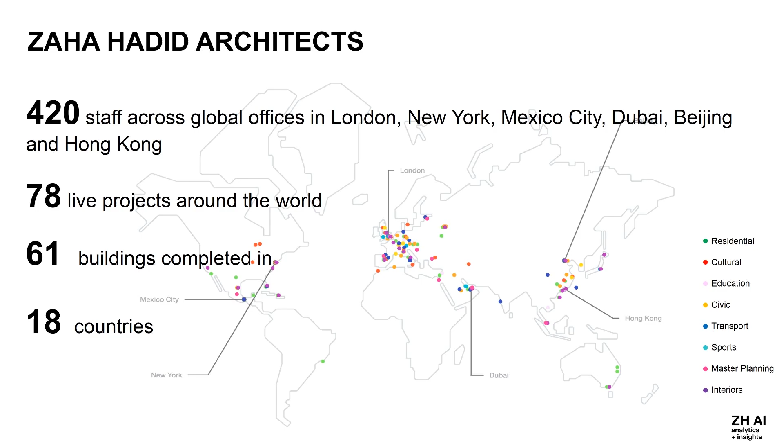of spatial design. For those of you who don't know ZHA, these are a couple of significant numbers about the practice, which is truly a global one, not only in terms of project locations, but also its employees. Currently, 78 ongoing projects around the world, with 61 projects completed in 18 different countries. We work at all scales and in all sectors with a strong focus on highly expressive architecture. One of the most iconic projects is the Heydar Aliyev Center in Baku.

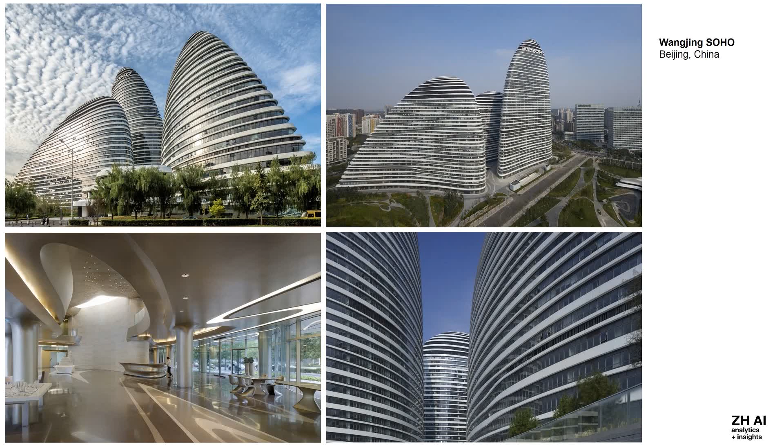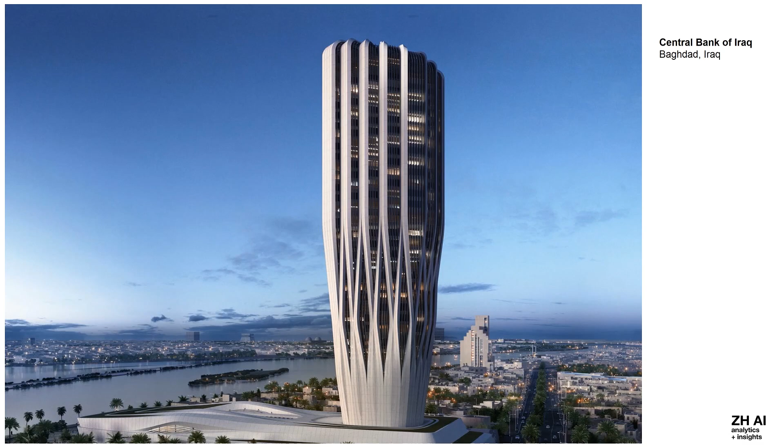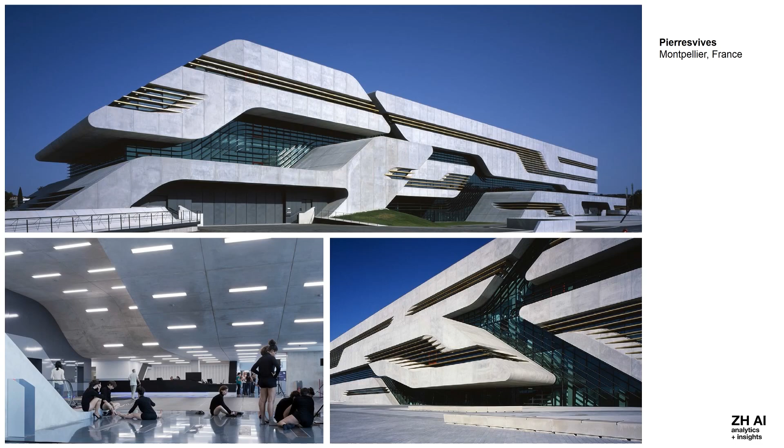But we will focus on the workplace-related projects of ZHA, like Wangjing SOHO, a 3-tower mixed-use development in Beijing, China, or the Central Bank of Iraq in Baghdad, conveying its core values, solidity, stability, and sustainability. The BMW Central Building in Leipzig, Germany, where the factory assembly lines run through the office space, the Antwerp Port House of the Port Authorities in Belgium, the Pierresvives Building for the Département de l'Hérault unifies 3 institutions within a single envelope: the Public Archive, a library, and the administration for the Department of Arts, Culture and Sport.

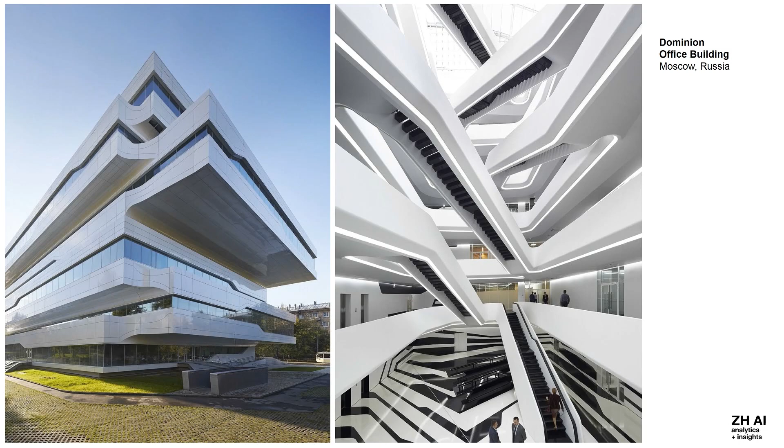Sberbank Technopark at the Skolkovo Innovation Center in Moscow, Russia, considered to be Russia's Silicon Valley, spanning almost 700 meters in the longest direction of the building. The Dominion Office Building is among the first of the new projects to be built for the growing creative and IT sectors in this primarily industrial and residential district in the southeast of Moscow.

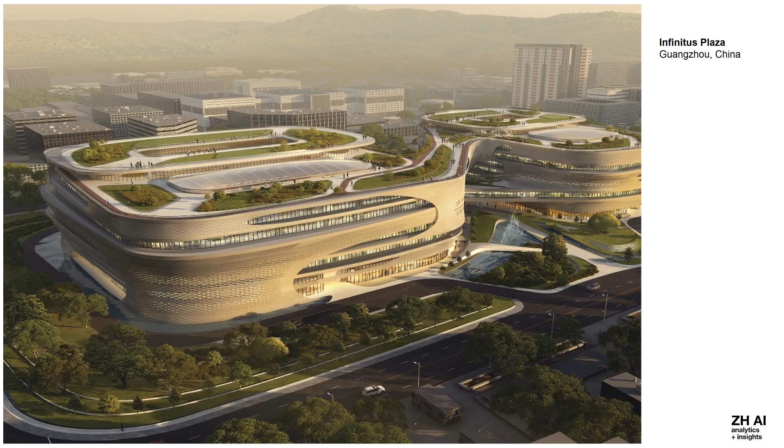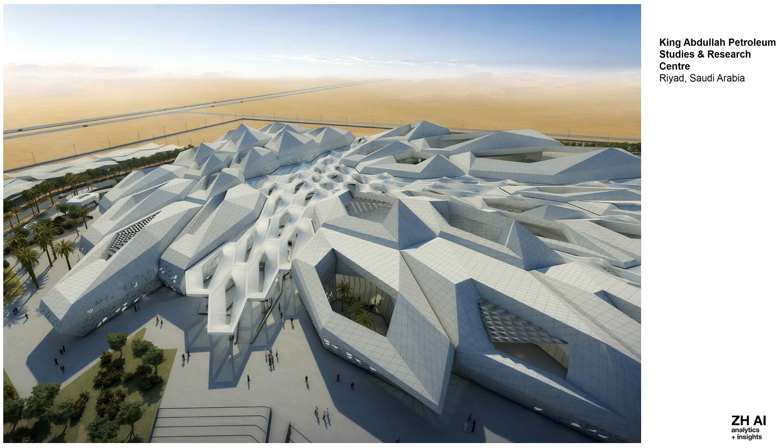Infinitus Plaza in Baiyun New Town, Guangzhou, China, which will be a campus of integrated buildings that combine intelligent technologies and environmental sustainability for LKK Health Products Group. King Abdullah Petroleum Studies and Research Center, which is executing the vision for a center-focused cellular structure of crystalline forms, a strong protective outer shell concealing soft, porous, sheltered courtyards within.

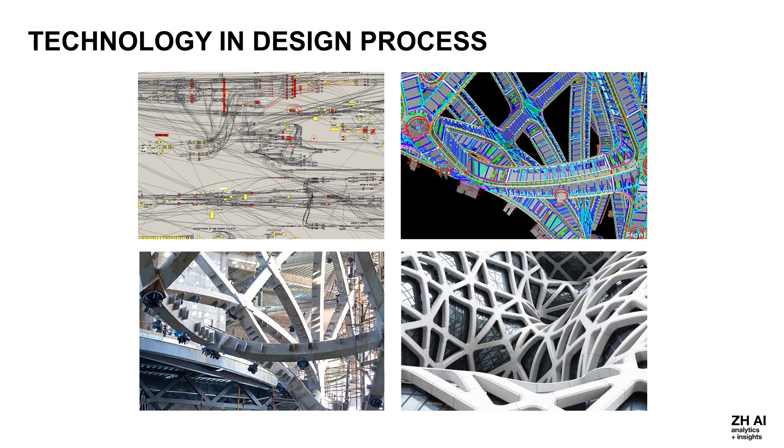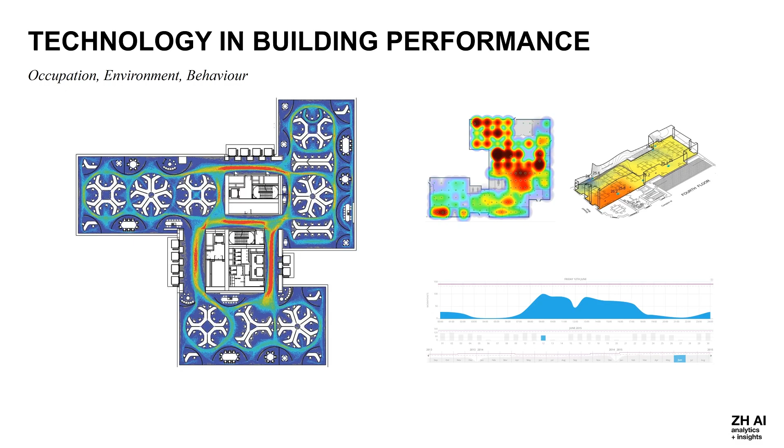So while early computational research at Zaha Hadid Architects focused on fabrication and the delivery of solutions for the complex geometry problems that characterize the firm's projects, new research streams, such as the one conducted by our team, focus on user satisfaction and building performance data, as well as virtual simulations of users' behavior in office spaces. Everybody knows that collaboration, strengthening the organization as a collective, and supporting well-being is necessary for a successful workforce, but how can we measure these things and derive valuable insights to make better design decisions?

When we talk about collaboration, one of our basic premises is that physical proximity has a direct impact on communication potential, which has been further linked to collaborative behavior in the workplace. MIT professor Thomas Allen discovered how communication drops drastically as distance increases, and that it pretty much drops to 0 after about 20 meters, which is a 20-second walk. Let's look at an application of this theory. Consider a typical center core building, such as this one. How many people are in the range of any of these desk locations?

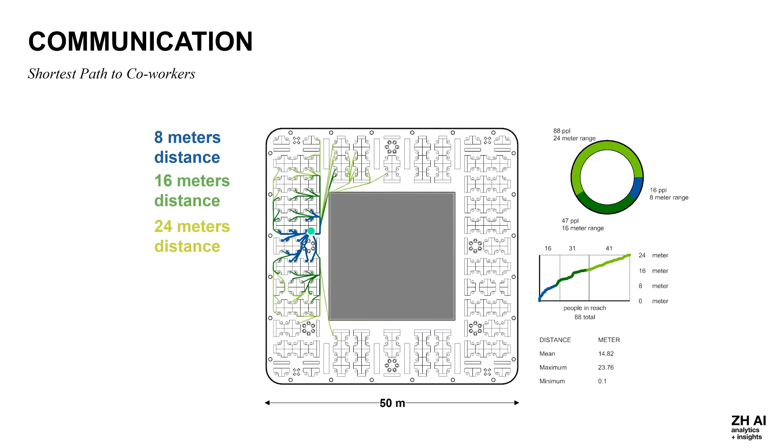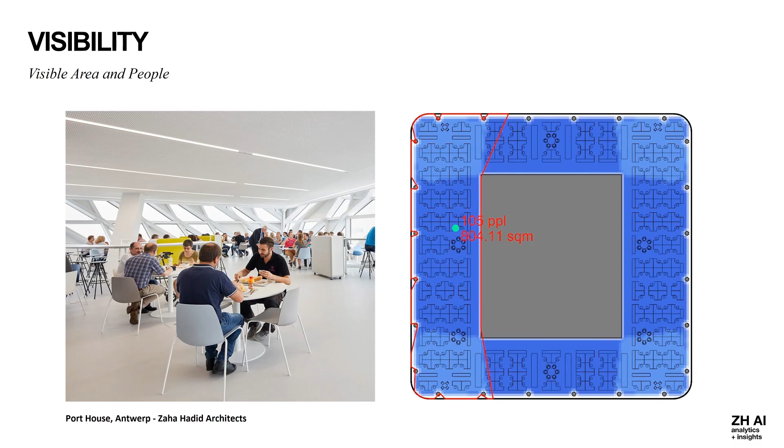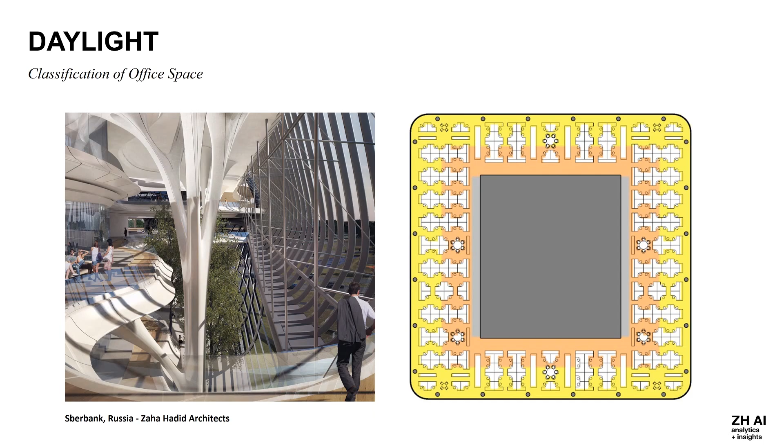This is an analysis tool for visible area. We are looking into how much area and how many people are visible from every spot on the floor plate. The dark blue and red areas indicate bad and light blue good visibility. We can also look at how each space compares in terms of environmental qualities like daylight penetration and categorize it according to the British Council for Offices into Class A, B and C lit space.

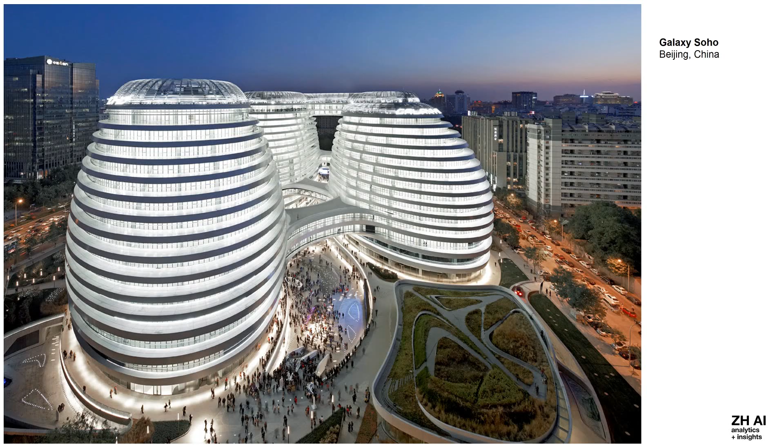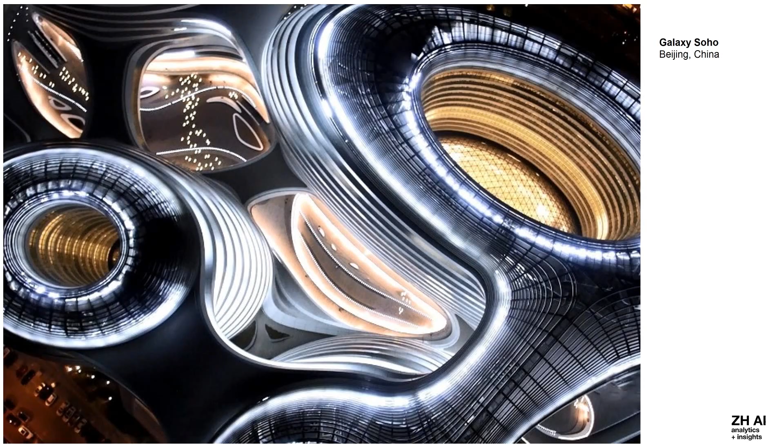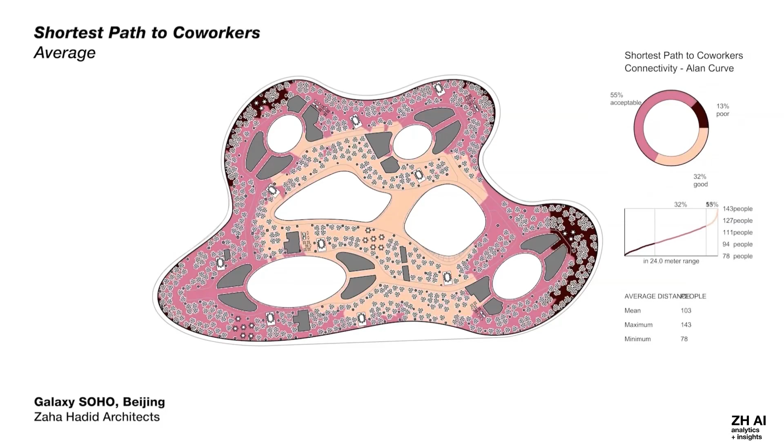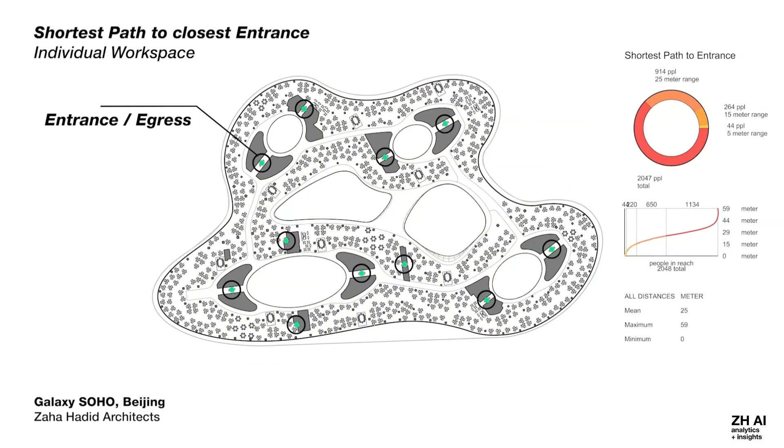This is the connectivity analysis. As a result, we can see which areas best suit independent teams in the more segregated parts of the office and interdependent teams in more central locations. We can also look at aspects like the shortest path to the office entrance. And we are able to identify most public and confidential spaces, as well as where to locate most and least mobile teams.

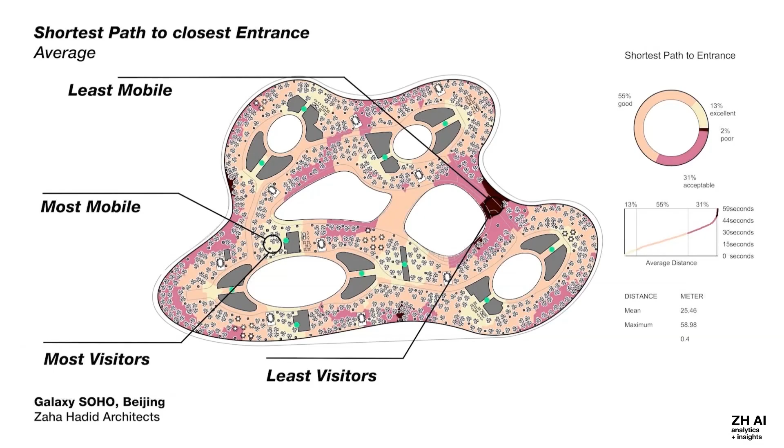Similarly, how close you are to facilities like breakout areas or other amenities. This allows us to determine the areas in which you are most likely to encounter the least distraction and quieter zones, as well as the noisier ones.

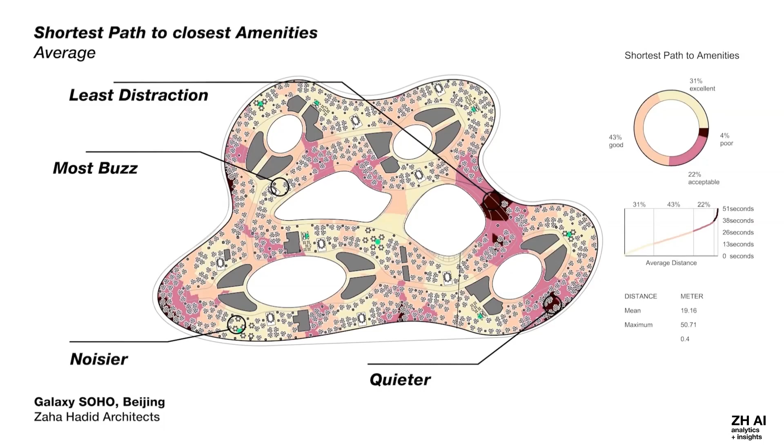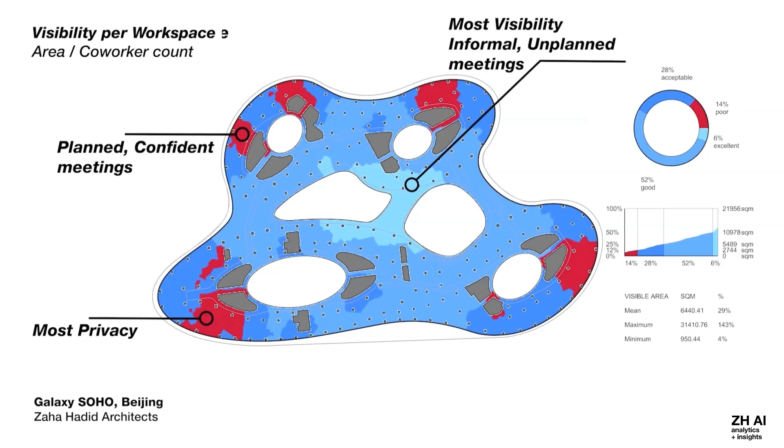How much of your surroundings you can see and how well you can be seen from a given location determines how exposed certain areas are to the public sight, helping the planning process by identifying which zones can be used for more planned, confidential meetings out of sight and zones for more informal, unplanned meetings in plain sight.

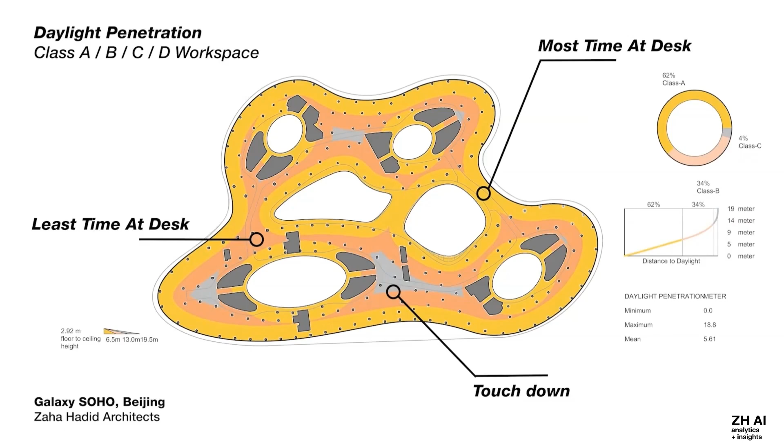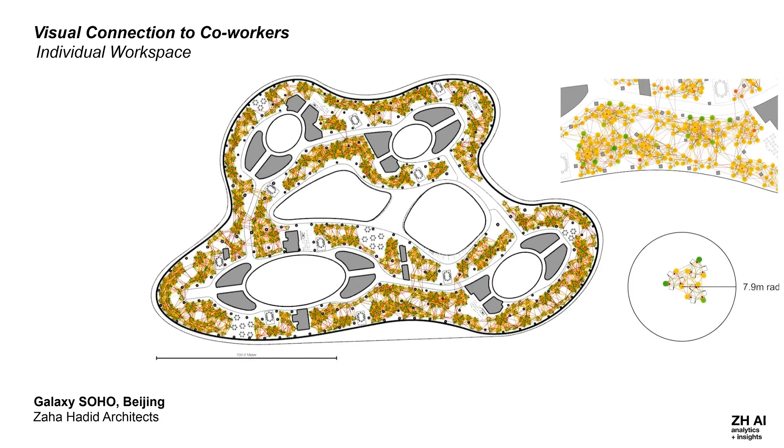Calculating the amount of daylight coming into the floor plate allows us to identify zones for different degrees of permanence. The best lit parts are great for spending most time at the desk, whereas zones with less daylight are better for short stay periods or touchdown zones. And also look at how different orientations of desks within these areas can affect visual connections with coworkers, as well as views. There's no point having a great view if your desk is facing away from it.

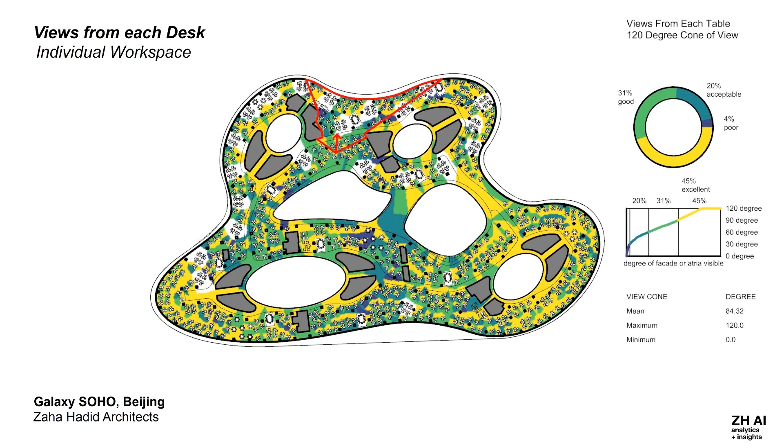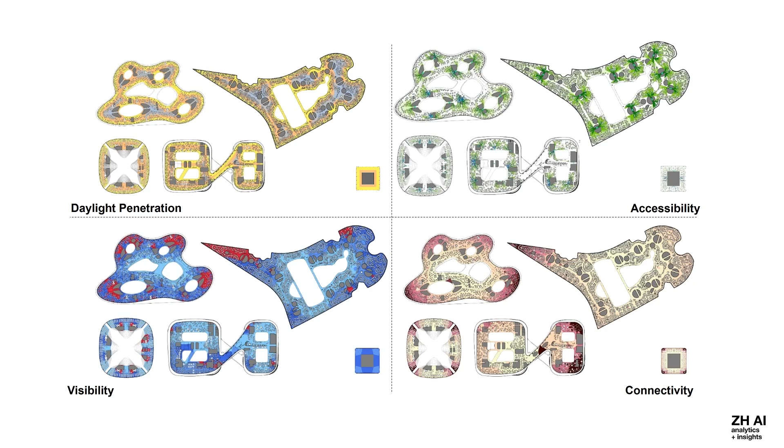The design analytics of past projects gives us a great idea of how specific design decisions supported or limited performance of space. We know now how to measure and quantify certain human-centric qualities of space and can start to think of how to actually design spatial conditions with the outcomes of those qualities in mind.

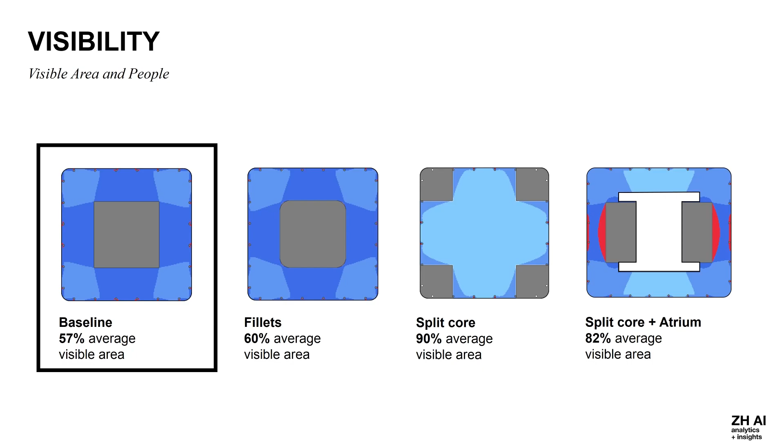Considering the center core tower as our baseline, looking at the visible area parameter, with 57% average visibility, by just chamfering the edges of the core, we can increase visibility by 3%, or with even more drastic changes, like splitting the core into 4 and pushing them into the corners, we can increase visibility by 33%. A more realistic option would be splitting the core into 2 and including an atrium, which still increases visibility by 25%.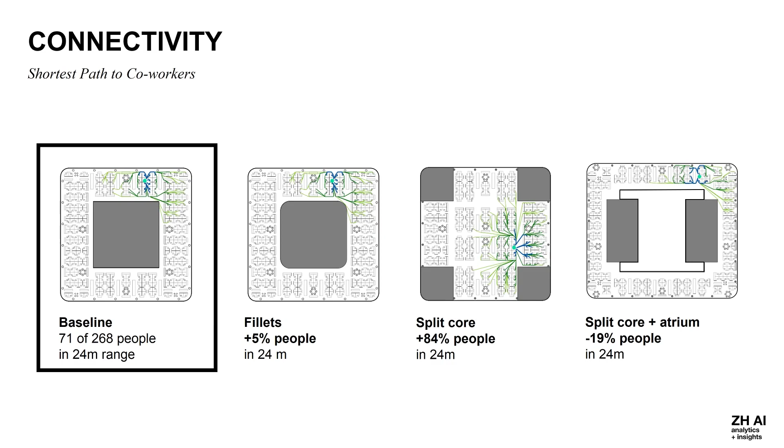Also, when we measure daylight, we find drastic differences across all 4 core positioning strategies. While the 4-corner core option has a high visibility, it lacks natural daylight. Our atria split core tower, though, has great daylight values. And the same for connectivity. While the 4-corner tower has great connectivity outcomes, the atria tower's connectivity is decreasing by 19% compared to the baseline. So now it's really up to what is important to us or a client, but this is really helping us to make informed decisions overall.

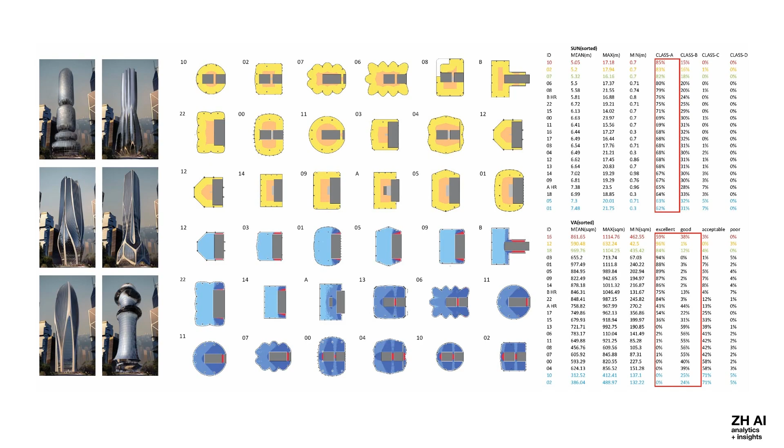For example, in this tower competition, we were able to rapidly assess a variety of core configurations and building envelopes to support decision-making in the early competition stages. The 18 design options in the last slide have been created manually, but what if there is still a better solution? This is an early version of an algorithm that can generate every core location and analyze it against every other.

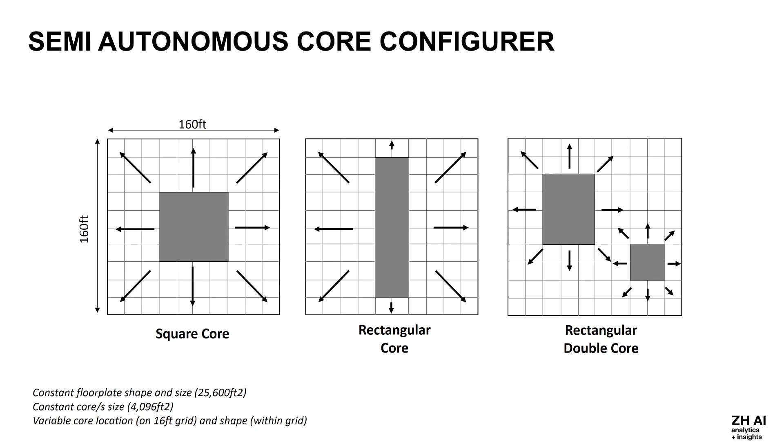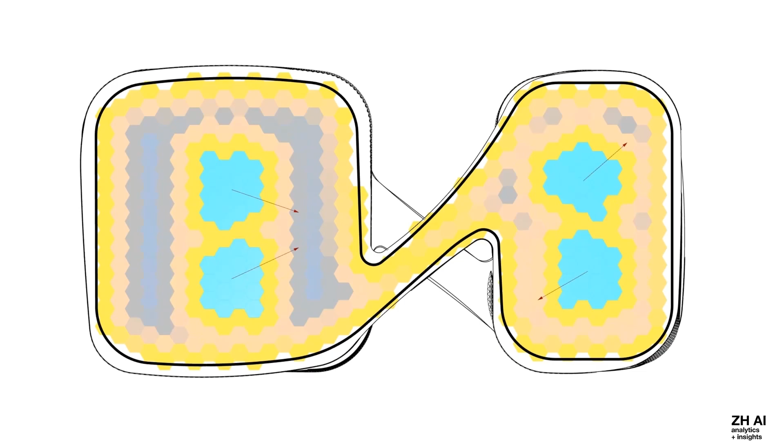The example I'm going to show is for a square tower, with every core shape and location within a 5-meter grid for both a single and double core option, which is then analyzed with the objective to optimize daylight and cross-floor visibility. At 1 option per second, it took 27 hours for it to generate, analyze, and compare all possible 100,000 options. Manually, if we were to draw up and analyze 40 simple diagrammatic options a day, it would take about 10 years. The majority of projects, especially at ZHA, do not come close to a 90-degree angled square, so we had to come up with a solution that would work with any other shape.

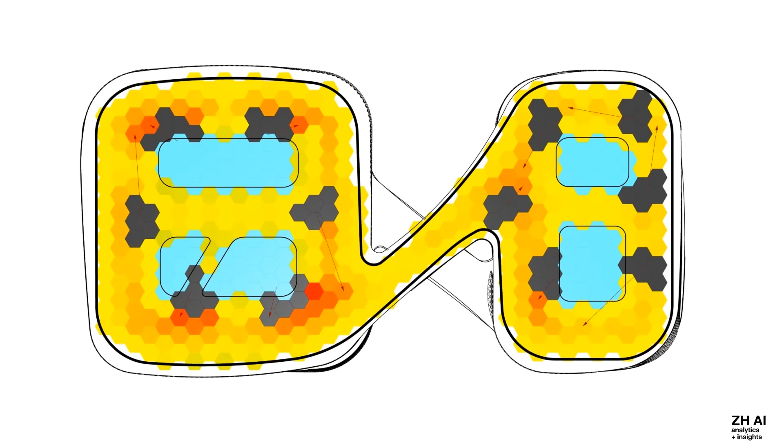This here is a particle system-driven HR and core placement tool, self-adjusting, again with the objective to optimize daylight penetration and cross-floor visibility, as well as escape distances.

Understanding how space impacts people is one thing, but the other is measuring the behavior of people in space. Learning from it and relating it back to the spatial analysis is another interest of ours. IoT devices like sensors allow us to look in more detail at the workplace than ever before. We have deployed sensors in a series of environments, one of which was an exhibition held by 3 of our research teams, CoDe, VR, and Analytics and Insights.

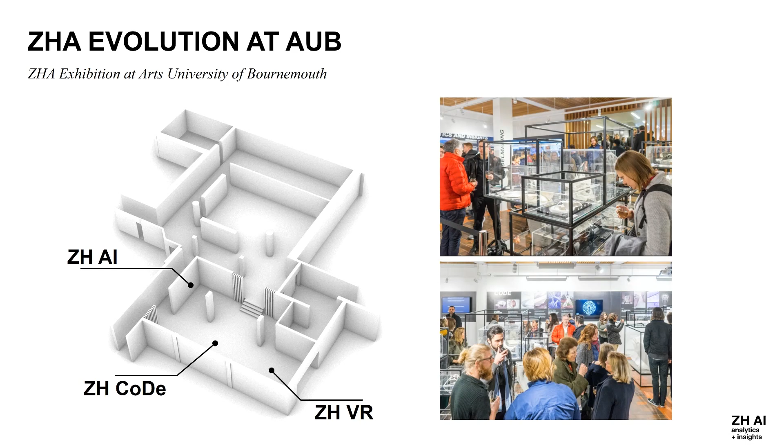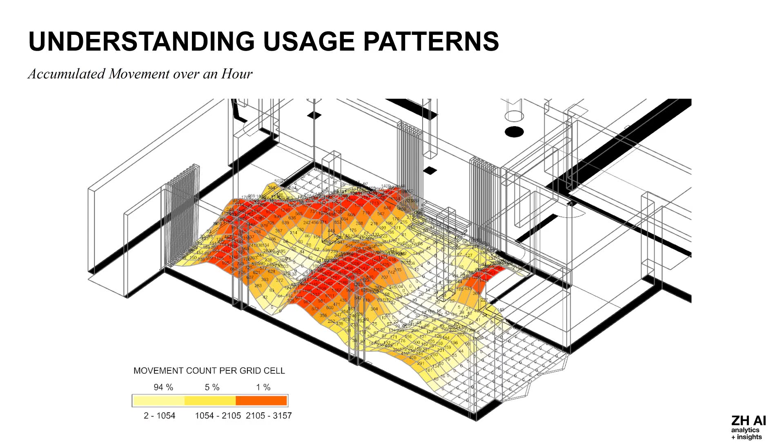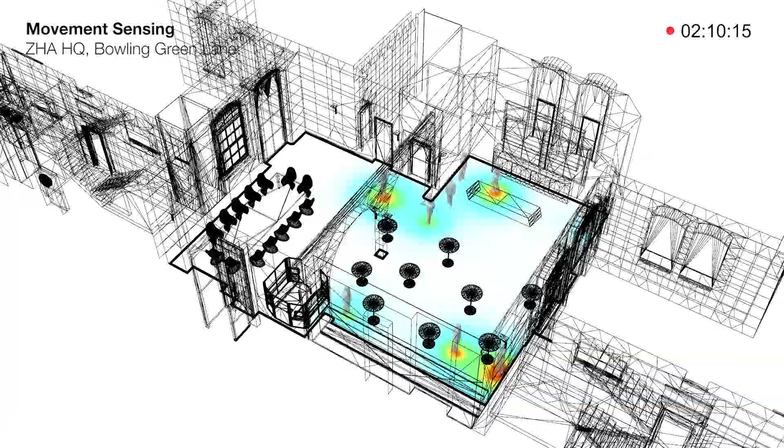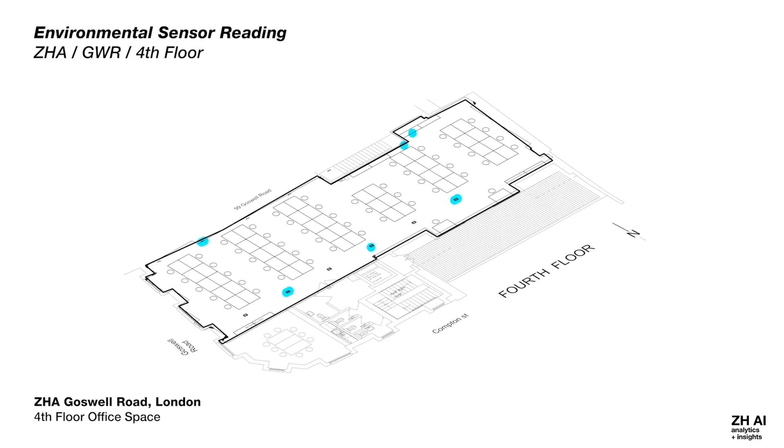We deployed the same cameras in our main breakout and reception space in London and are able to map interaction levels using movement patterns. Or environmental sensor readings from one of our design studios, visualized as a 3-dimensional landscape of temperature, light, and air quality that can be easily understood by building operators.

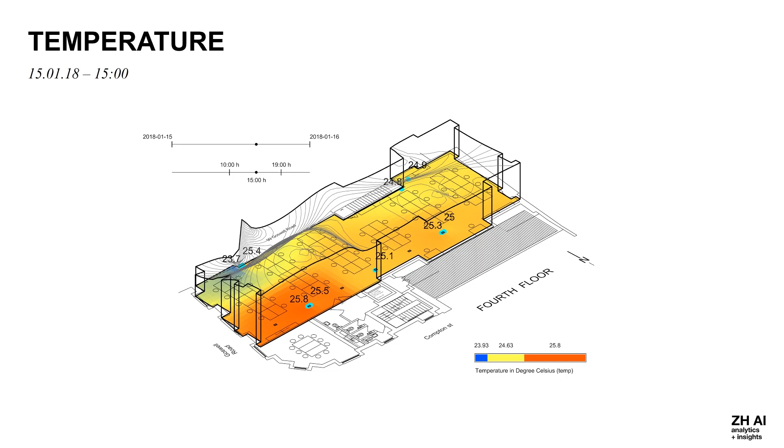And make this data available to the end users of the space, such as temperature, daylight, CO2 levels, and humidity. Going forward, if users are able to input their own preferences, this can suggest what location might be most comfortable for them.

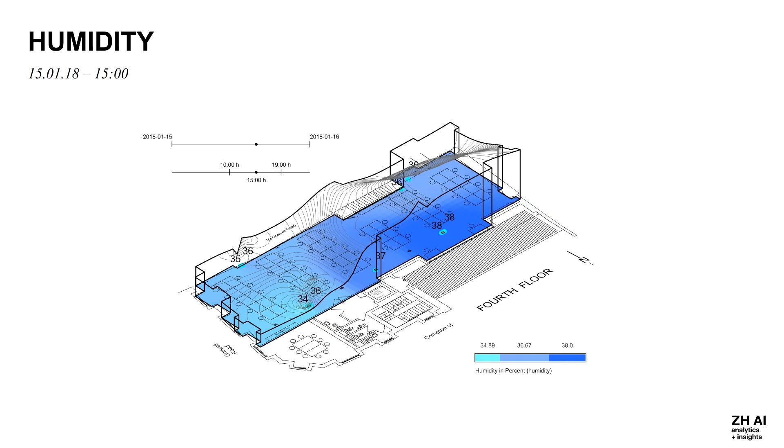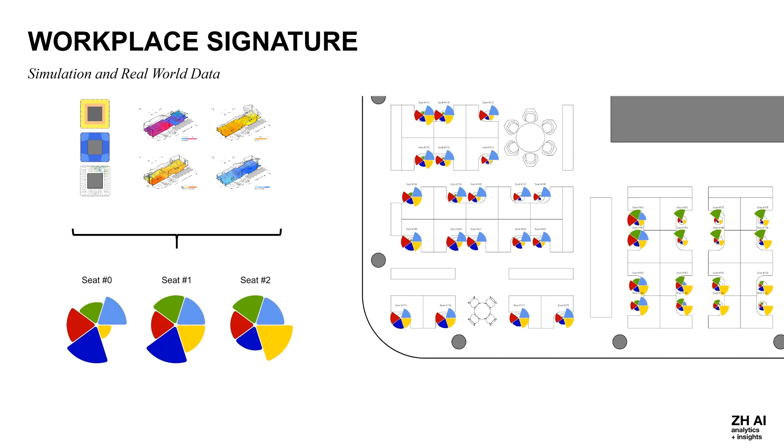So what can we use these measurements for as workspace planners and designers? By bringing all this data together, we can start to understand the workplace much more clearly, not just on building and floor plate level, but on an individual level, creating a unique workplace signature at every individual work setting. So we can collect data on people's preferences and match them to the right workplace. It's not enough to look at the individual alone.

We have just shown a group of 19 people, but what if we have to place 268 people on the floor plate? There are more seating combinations than stars in the universe. One of our solutions to the problem is to use a divide and conquer strategy.

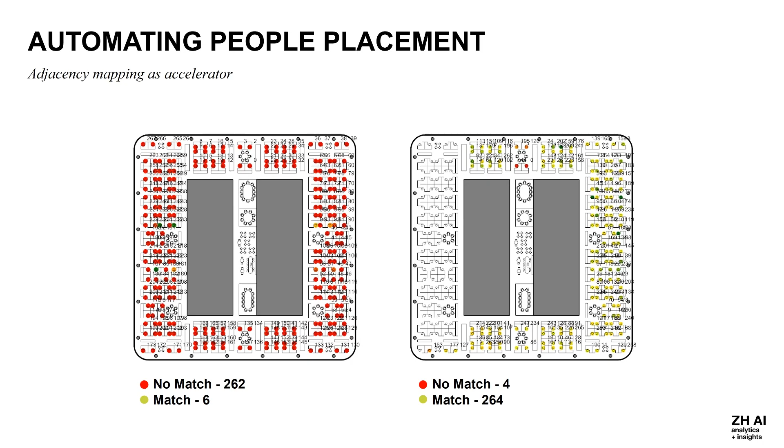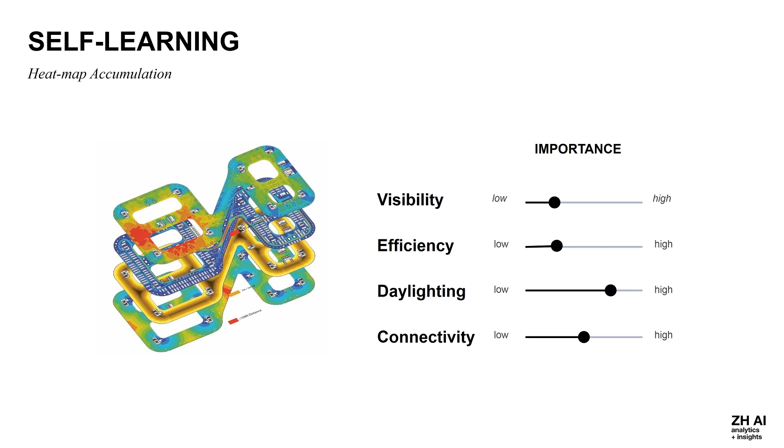Ultimately, we're using these tools to build a spatially intelligent model and automate designing and the overall planning process. We are striving to create a system which is integrating the multitude of parameters and influences we have been presenting to you, able to recursively react to new input, learning over time. We started investigating this by developing a matrix of furniture typologies that could be adaptively interchangeable and scalable, constantly updatable from a catalog of activities.

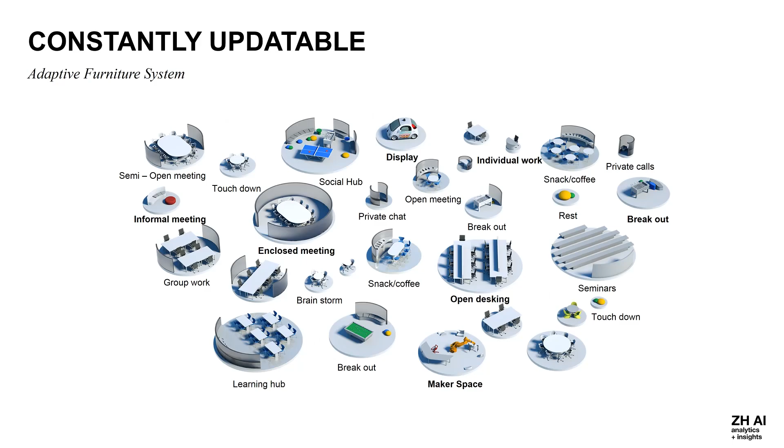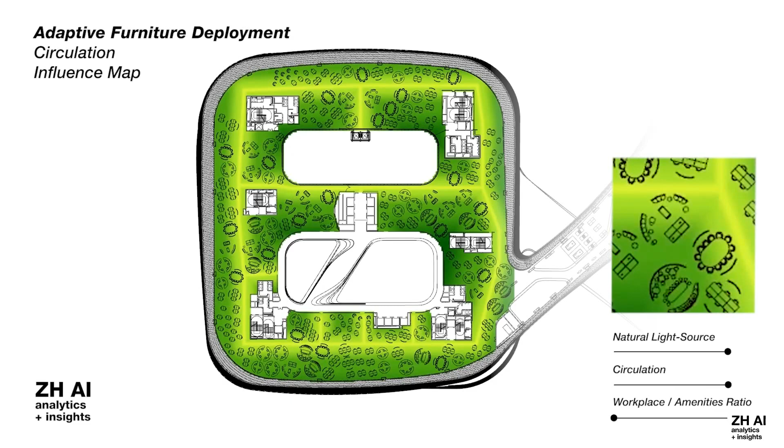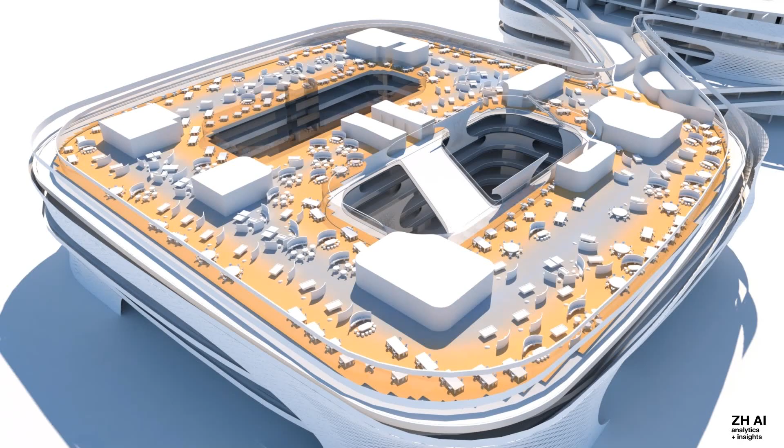We started to use algorithms from the physics field, like particle systems, to deploy furniture based on the design preferences input. It could continue to adapt, evolve, and improve through the cycle of the workplace. Multiple diagrammatic options could be generated virtually instantaneously, creating a more efficient and rigorous design process. This can then be designed further once the preferred option has been established.

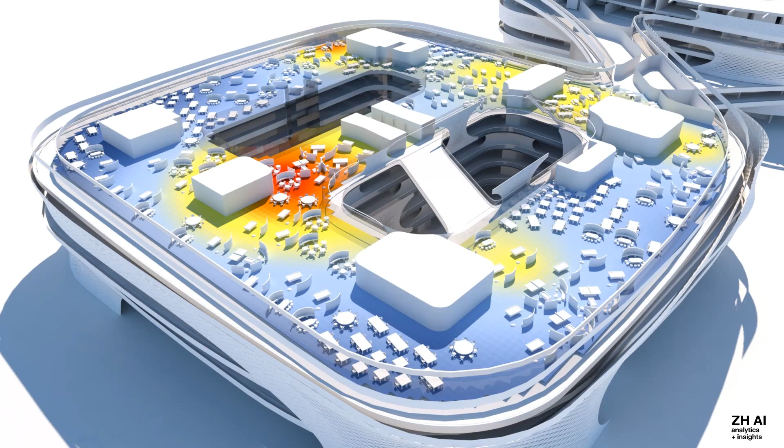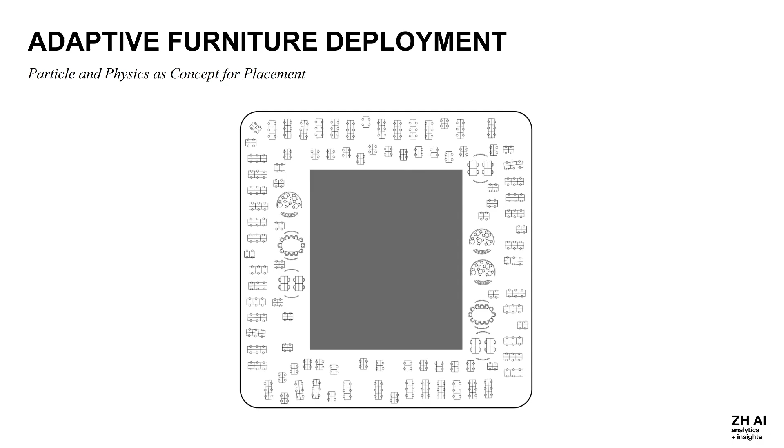And design would not need to stop once the workplace is occupied. The design could update itself based on new density requirements or mix of program or collaboration needs. Based on sensor and user analytics, the design could even suggest its own updates periodically. This seems to be quite close to reality, and while a designer would sit on this for hours, our algorithm was able to produce this floor plan in a couple of seconds. We can make changes on the fly and reevaluate the adapted furniture placement.

I believe this is a pioneering time in workplace architecture, and it's been an honor to share some of the excitement we feel at the Analytics and Insights team at Zaha Hadid Architects.